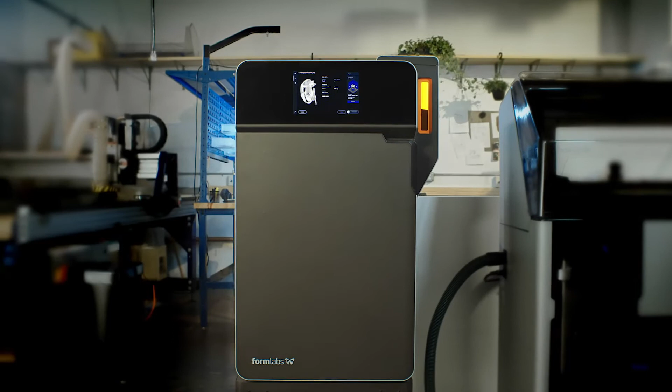Design and manufacturing workflows are closer together than ever, but our ideas still often exceed what we can physically realize. A new wave of independent manufacturing starts now with the Fuse 1, an affordable, compact SLS 3D printer with an intuitive workflow.

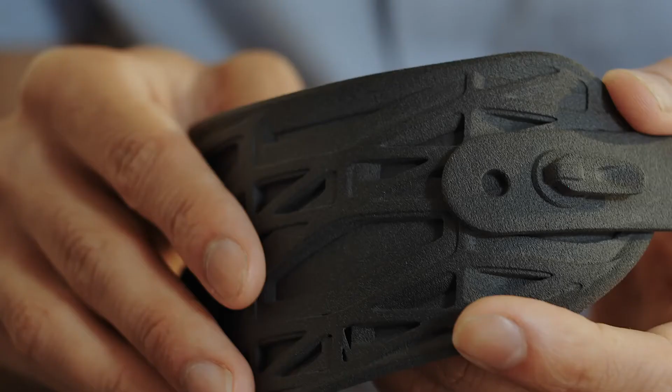Selective laser sintering, or SLS 3D printing, is relied on for printing strong, functional nylon parts. In the past, SLS has been too expensive and difficult to use for many businesses. The Fuse 1 allows you to fabricate production-ready parts and high-performance prototypes.

Control your entire process from iterating on your first concept design to manufacturing finished products. The process starts in Preform, our print preparation software. Preform's part packing algorithms can automatically arrange many models in a build. During setup and printing, the Touch UI walks you through every step.

Monitor your print from the touchscreen or from your computer via the integrated live camera.

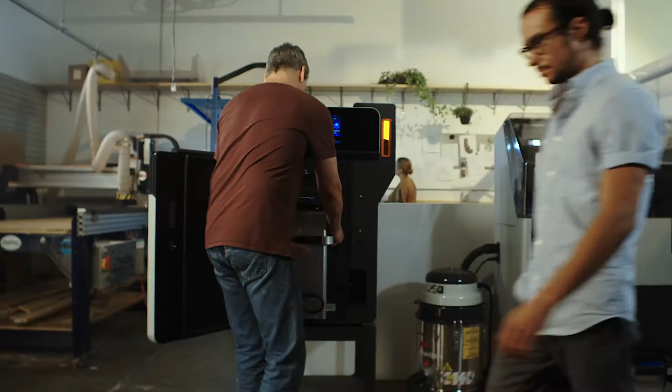Once your print is complete, transfer the build chamber to the Fuse Sift. This safe, efficient powder recovery station completes the workflow.

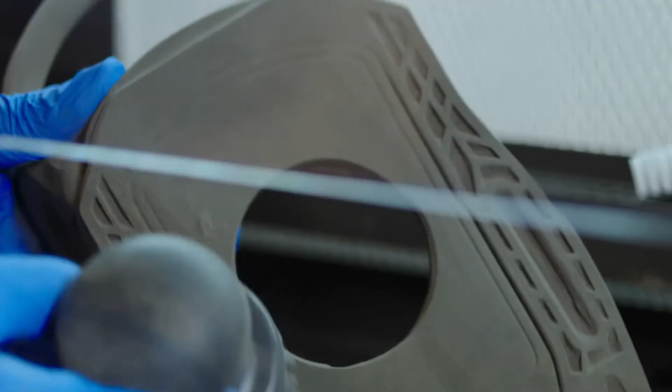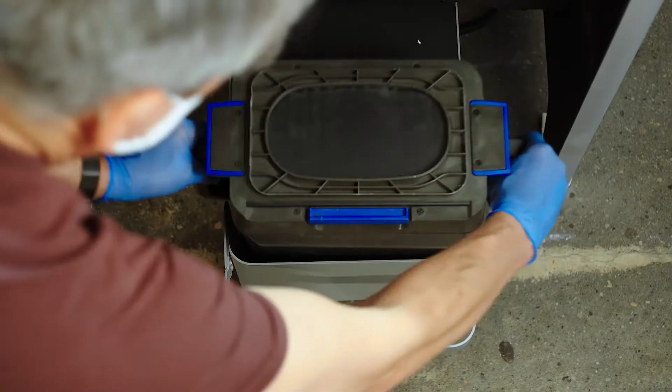Fuse Sift will automatically dispense and mix used and new powder after you set the ratio. Reduce waste by recycling powder at a 30% material refresh rate. This means you can print up to 70% recycled powder.

After you've transferred a completed build to Fuse Sift, swap out the entire build chamber from the Fuse 1 for non-stop printing. SLS 3D printing fuses nylon powder layer by layer.

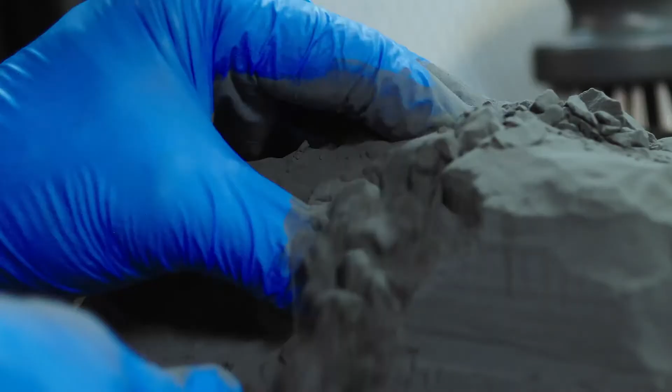The unused powder supports the parts during printing, so you can create complex, interconnecting designs with no need for support structures.

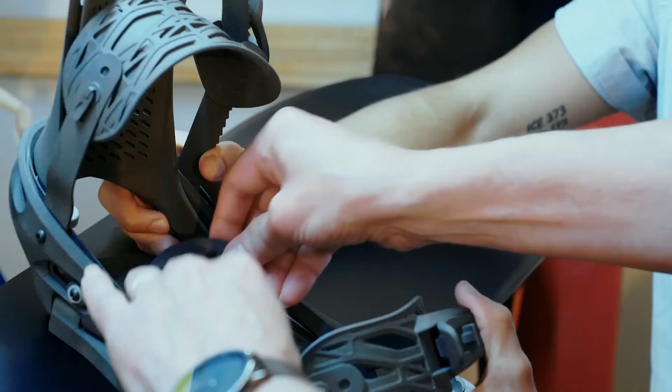Nylon parts balance strength, flexibility, and detail, so prints are ready for rigorous functional testing or to ship ready-to-use products to customers. It's time to rethink product development and take control of your own manufacturing.

The Fuse 1, Production SLS, finally within reach.